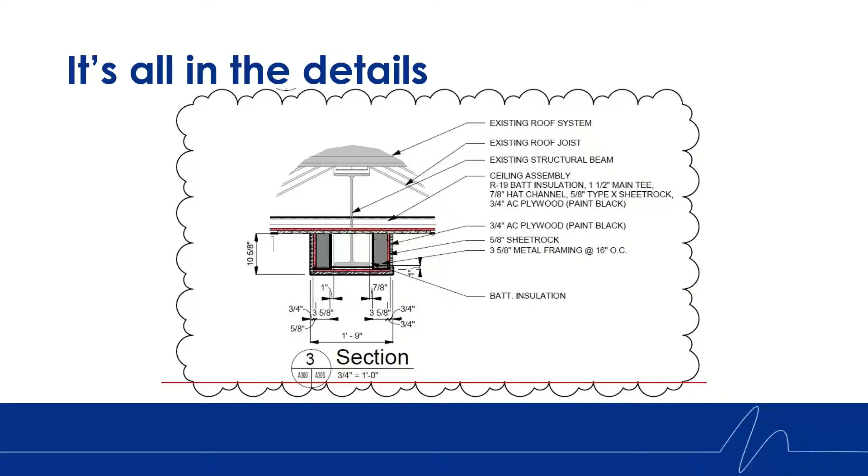This detail was provided to Kinetics for an isolated ceiling project. As noted, the ceiling assembly is shown going through an I-beam. This is an example of a detail that is not constructible.

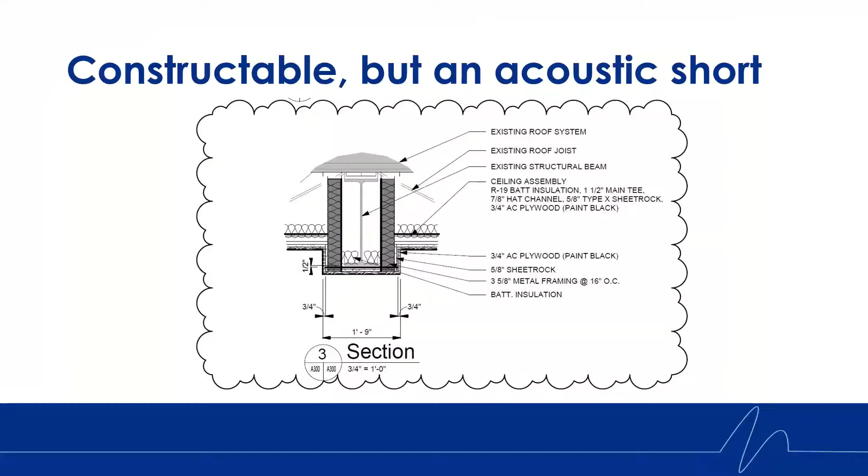At this point in the review process, I had drawn two examples of how this condition could be handled to ensure the constructability and acousticability of the project remain intact. The purpose of these details is to be presented to the design team and consultants on how a situation like this can be handled based upon our experience. Again, it is important to note that we are not trying to change the design, but more or less to present ways of bringing the designer and acoustical consultant's vision to life.

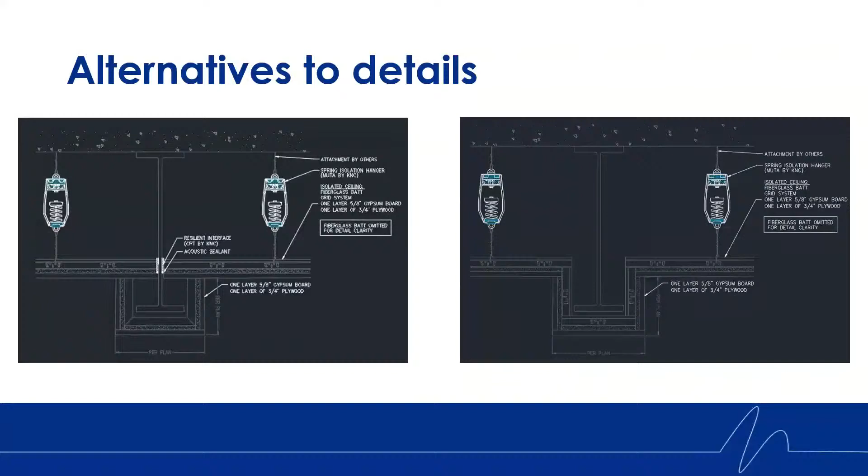For this example, I believe the architect, along with the acoustical consultant, chose to go with the detail on the right.

To come full circle on why Kinetics cares about you and your project, it's also about saving you time and money. This is an example of what happens when Kinetics is unable to obtain the information required to do a thorough review.

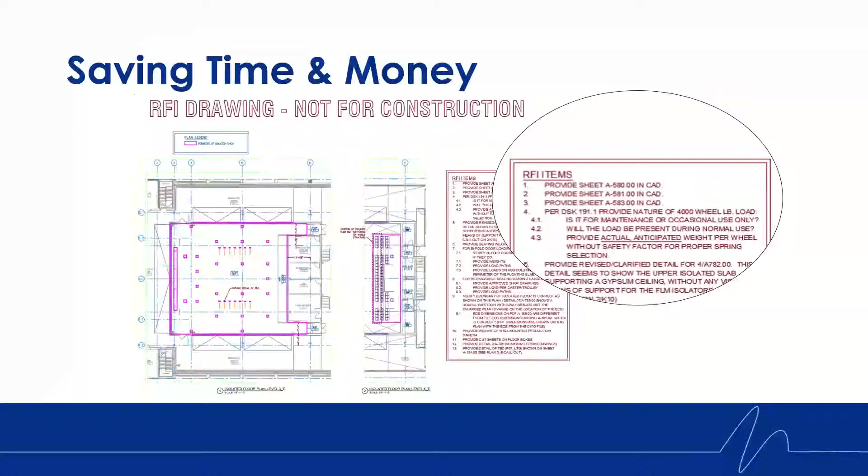These RFI drawings are an effective means of obtaining the required information. However, if the required material and information had been provided, this RFI process could have been bypassed, saving time and money.

This section was prepared by Eric Fenton, and we will cover projects that needed Kinetics Noise Control's input during the design phase. An oversight overseen is money made.

Many times during the design phase of a project, before the vendors are even queried for their product information, decisions and guesstimates are made that can ultimately require expensive change orders. Oftentimes, this information falls outside the typical scope of architects and acoustical consultants prior to the vendor submittals being received.

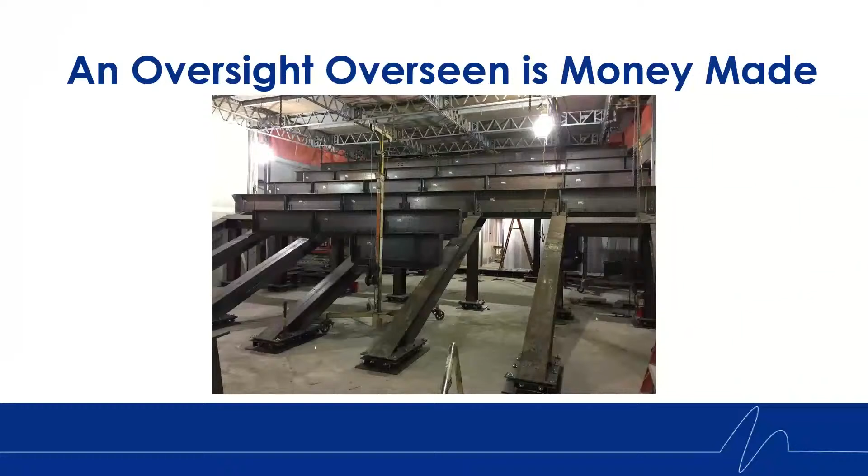Kinetics Noise Control and our reps have a record of design criteria and situations which have caused special consideration and product applications that can, if queried, cast light on project requirements prior to the job going to bid, thereby reducing unexpected cost and delays ahead of installation.

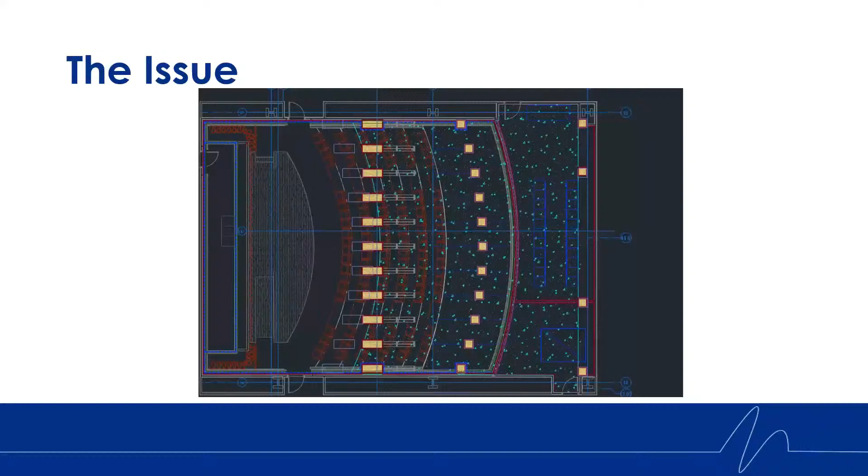Kinetics issued an RFI for the riser weight the first time the drawings were reviewed, but no one had the information at that time. If the Kinetics rep had been consulted during the design phase, the issue of how to support this type of load would have been identified and would have been a part of the budget and bid documents.

When the information was provided to Kinetics, we developed a solution within 11 days for a seismically restrained isolator for the riser. The delay and change order could have been anticipated had Kinetics been part of the design phase discussion on isolation requirements and costs.

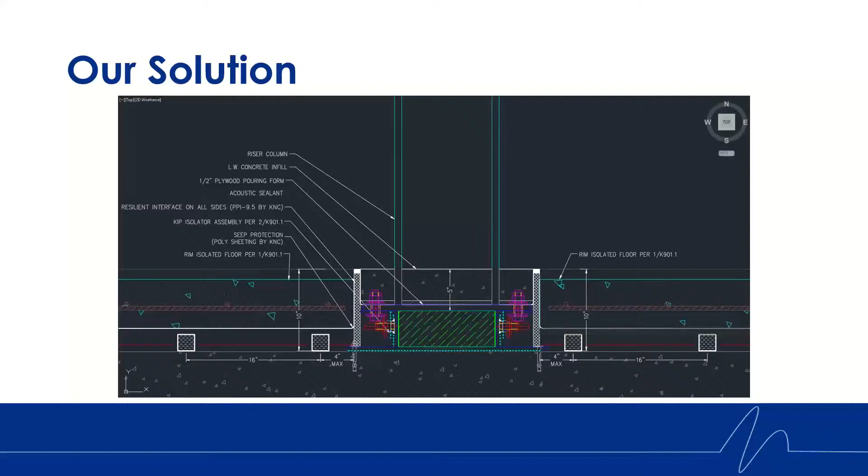Some of our custom solutions are used repeatedly, some only for the project for which they were developed. Kinetics Noise Control is in the position of offering the widest variety of isolation solutions. We offer spring isolation, elastomeric, polyurethane, and fiberglass, so we are not limited in the type of solutions that we can provide. As we sell all types of isolation material, we are able to offer the best solution for the right reasons.

In this project, the structural slab was specified for a load far below what the isolation slab with its supported equipment required. The slab thickness in some of the areas almost tripled in thickness due to weight and lateral forces, and the structural slab below required reinforcing. There was a year's worth of work in place, and the remediation was a big change order and delay in the project.

The first change in approach to solving the loads was to change the isolator type from a jack slab to a RIM roll-out isolation material system isolated slab. A jack slab has a limitation of only 3,300 to 3,500 pounds capacity per canister, and to handle loads above that often requires nesting canisters too close together.

An isolated pouring form, however, allowed close nesting of the isolators, thus allowing the proper capacity to be provided without compromising the integrity of the slab. Kinetics offered two additional solutions for the isolated pouring form, which aided in making the best decision for the project.

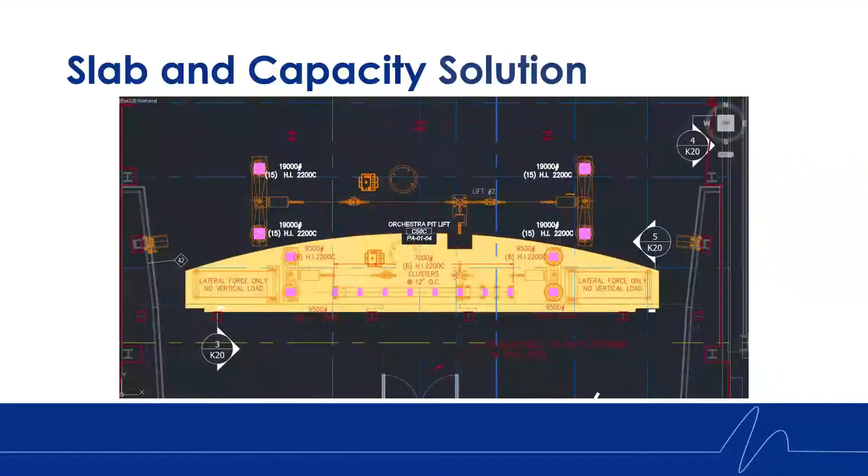In this case too, consulting a Kinetics rep in the design phase to review isolation constructability could have saved months of delay in determining the best way to remediate the situation.

Engaging Kinetics reps early in the project can help identify constructability issues and challenges ahead of time, so that the project can move forward without as many interruptions. Generally speaking, if you have any load exceeding 4,000 pounds in a small footprint, it is wise and most likely profitable to contact your local Kinetics rep to review what may be required prior to sending out to bid or bidding the project itself. Mechanical and HVAC equipment are usually not an issue, but be aware of retractable seating, isolated risers, heavy equipment, theater equipment, and specialty construction, to name a few.

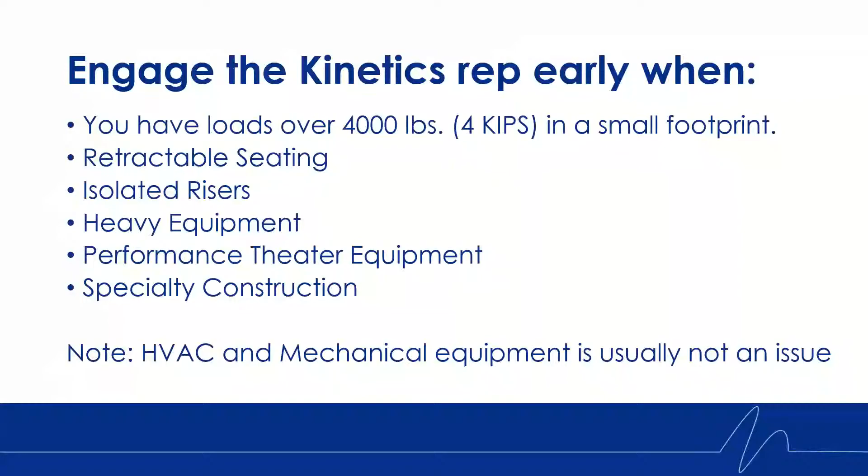After the questions, we will reveal the results of our poll. Tanya, do we have any questions? I must have done such a wonderful job that we have no questions. I would like to take just a quick moment to see if any questions are coming in. Seeing none, I would like to bring the results of the poll so we can see what will be covered next.